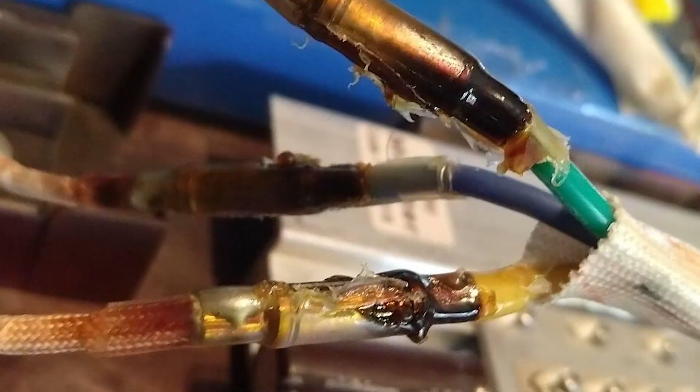It was around this time, in mid-2014, that I realized the severity of a lot of the electrical failures beginning to emerge. So I went to China, wanted to make sure all those quality control issues were squared away. My first stop was in Dongqing.

This area was interesting. You would see group rides just nowhere else in the world. This guy, Eric, he helped me out a lot.

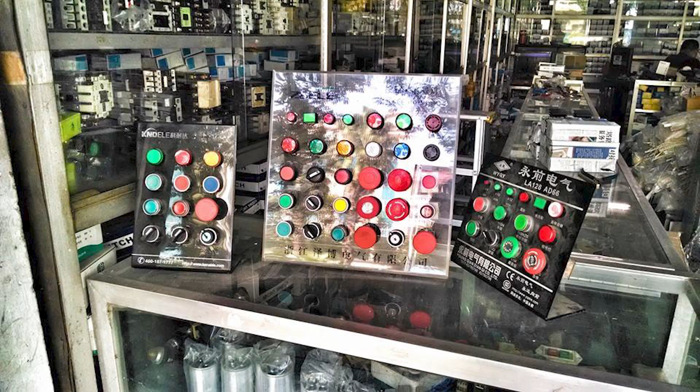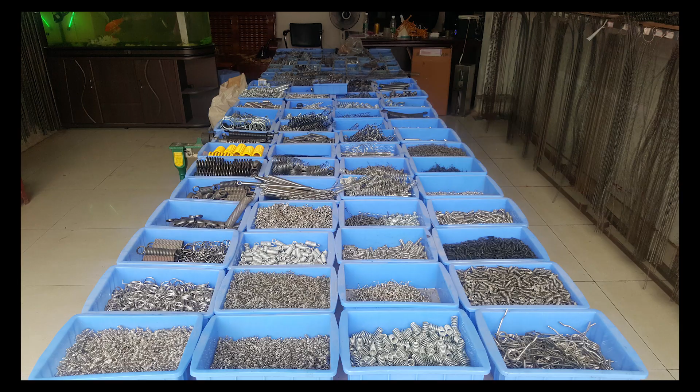But before I could even get to the factory, wait, stop, what's that? Air compressing tanks? Sheets? Rolls? Breaking Bad China edition? Chain assemblies? Pneumatic actuator shop? Button shop? A shop with nothing but wheels? A shop with pumps and motors? A shop with nothing but hydraulic couplings? A shop with pneumatic cylinders, springs, bolts, more bolts, more bolts, more bolts.

Yeah, time to go to Hong Kong. It's now October 2014, and there was some kind of protest going on at the time. I don't remember what it was about.

Now let's ride up in there, like on that hill. This is so steep. That's the mind-blowingly steep hill.

Okay, check it out. Turning is definitely not intuitive. It needs something to stabilize the leg.

Yes, that's Jason, the one who runs e-wheels nowadays. We sat down and had a conversation in 2014.

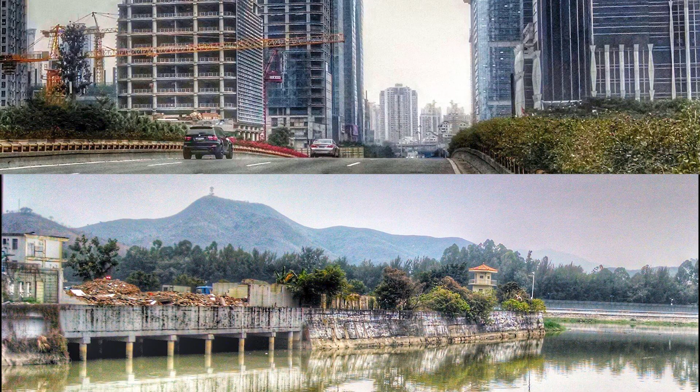Pack my bags, time to go to Shenzhen. Shenzhen, lots of buildings, lots of wheels, lots of wheel-shaped buildings. No, actually, there's only one of those. On the outskirts, you get these amazing, cool areas you could just explore and ride, and it's totally smooth. Cities, they just seem to go on forever.

And then I started getting into some group rides. You know, it was just a few of us. We had some wacky vehicles, and there's a one-wheel.

I was trying one of the first gen one-wheels in 2015. That is an SBU, self-balancing unicycle with a seat. I like unicycles without seats.

Gotway M10 Gen 1 edition. You can almost stop in place. There's so much turnover. I didn't take it easy on these early wheels. I pushed them to their absolute electro-functional limits.

Time to leave Shenzhen. We're going back to Dongguan, this time the Changping area, which is actually very close to where I originally landed in Dongqing.

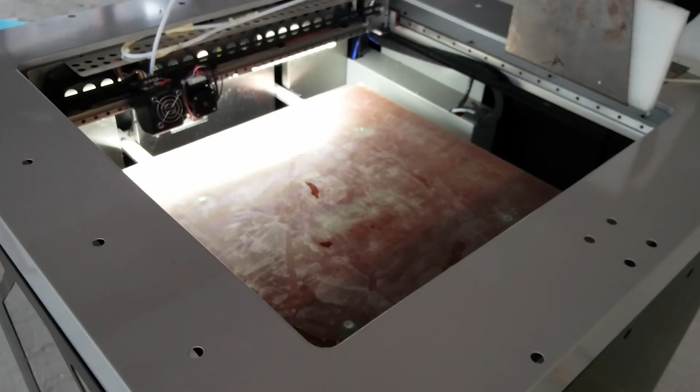So on my way, I built this contraption, and it landed an investment which basically set us up in this office with this giant 3D printer, literally a giant printer. And well, as you can see, it had some giant problems.

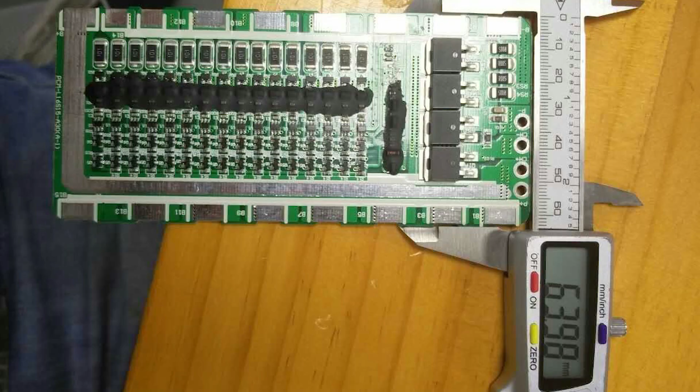Although we did get some successful prints, but the weld quality of early welders and the BMSs available at the time were just atrocious. However, you can see my first pack.

This was a prototype wheel we made. That's Ace, my mechanical engineer. He's the guy who set the foundation for my 3D modeling skill set, which I use to this day.

Back to Shenzhen. But this time, where am I? What am I doing on these one-wheel things? I was at this factory for a different reason, and they just happened to be lying around, so I happened to hop on a couple of them and ouch. But, I mean, it did the thing.

Now, this is a very unique picture. It's the only one I ever have of setting up this one-of-a-kind prototype device. It was so small, I could actually fit it in my backpack if I took the pedals off, and it was very nimble, and it had a hollow core motor.

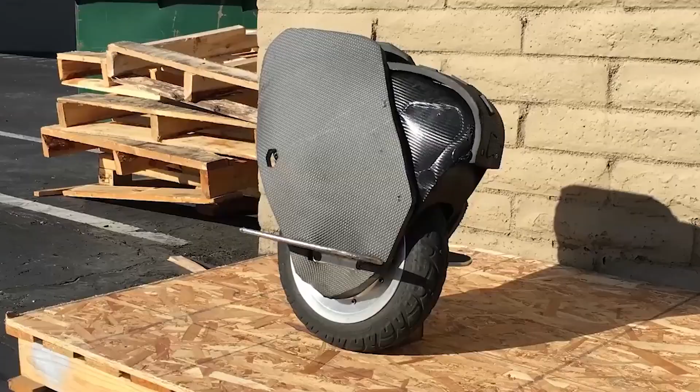Before, Gotway had hollow core, but the control system left something to be desired. It's time to go back to China and find a new controller.

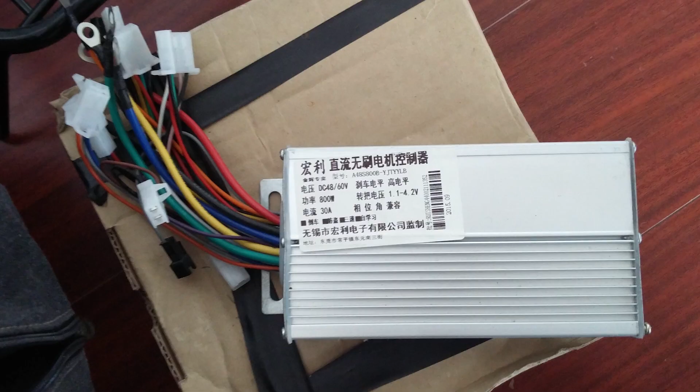I came across all kinds of interesting controllers. This guy didn't work, but it was very interesting. 2018, VESC hits my workbench and goes up in flames shortly thereafter.

But I think to myself, these motor controllers are very interesting. I should build an entire electric skateboard that runs on them.

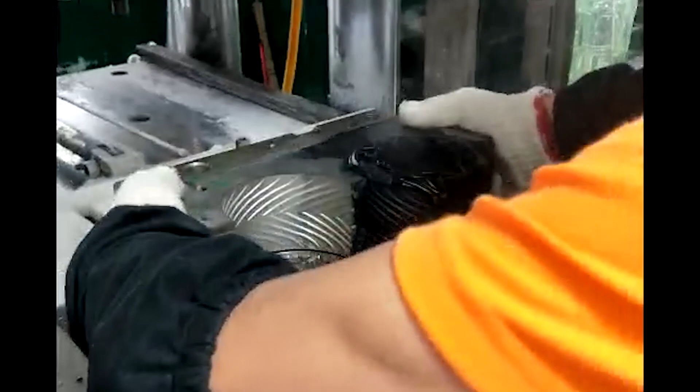As you can see here, this is one of our early prototype molds for the airless tire. It's actually vulcanized natural rubber, so it had a very long lifespan.

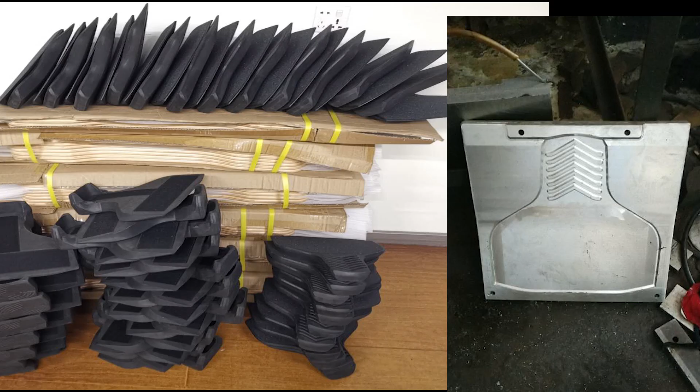It had custom built hub motors and early generation split packs, but as you can already start to see, these split packs are not ideal. We took things to scale, we built molds. Time to go back to the US and show people what we got.

For a hot minute, skateboards are actually faster than unicycles. We're moving, 41 miles per hour.

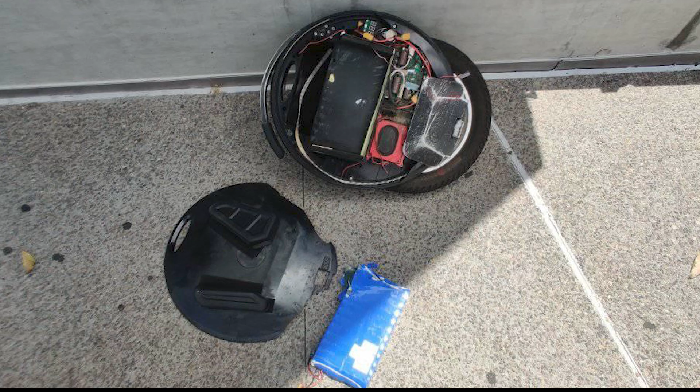To be honest, I like unicycle more and ended up pausing the skateboard company due to COVID. During that time, the unicycle, a Gotway Nikola, and I crashed it shortly thereafter.

I'm already wearing decent gear. A little bit of plastic stitching and she's back together.

Maybe I should start making my own mod kits. Like, what can I do with these plates?

But it's time to move, I need to get out of California. This time to Mexico, I get my own place. I don't have to share someone else's house. My own little FOCer, yeah, that's right.

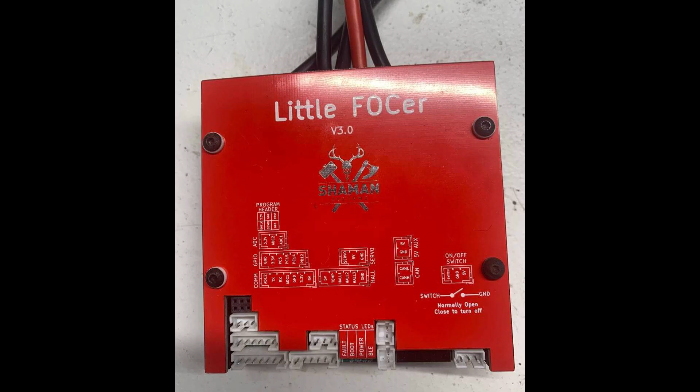Let's start VESCing some Onewheels. This one's already got a CBXR in it. How hard could it be, right?

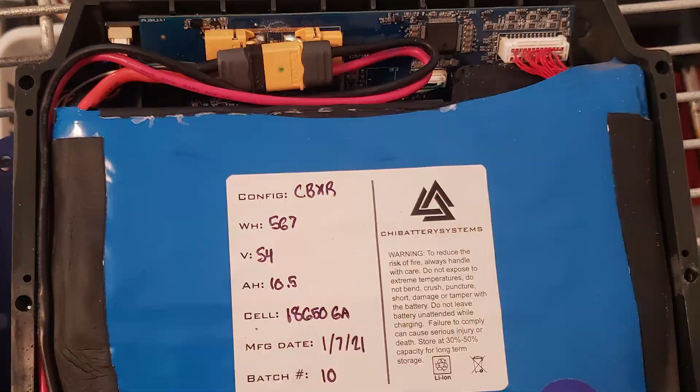But we were on the Balance app, and 3D printing boxes was the norm. A box? Well, no, not that kind of box. This kind of box, something more like this. Well, not literally like that.

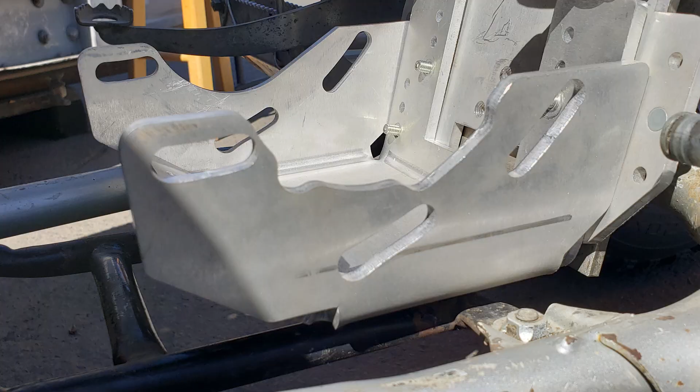The process, the sheet metal, it was actually quite amazing. Because if I could use sheet metal to hold a hub motor, I mean, it does that.

So basically, we could just make a box out of sheet metal and it'd be much more durable, but we have a welding problem still.

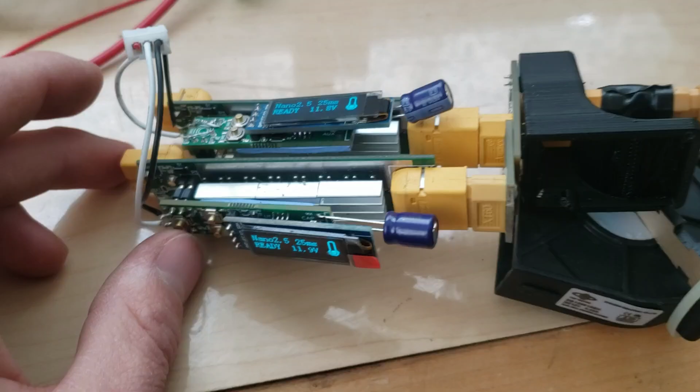Combining multiple welders off the market is not going to do the trick. But hey, I've got this pure AC generating out of VESC. Look at that, coming along nicely.

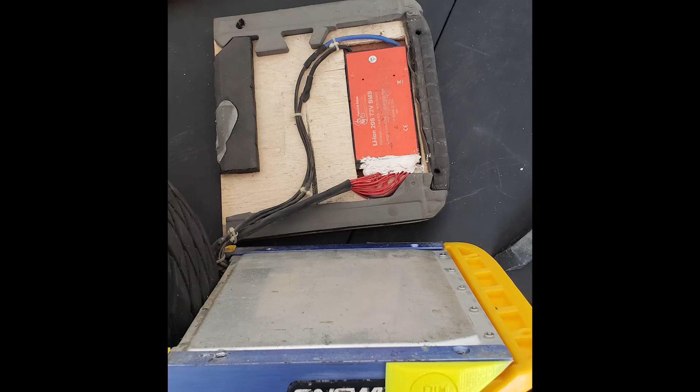Decent prototype, but the BMS problem still exists, and making these split pack things is a hassle. Look at how complicated that is.

We could get it to balance, everything was stable, custom VESC control, having fun, it's the life, you know, things are going great.

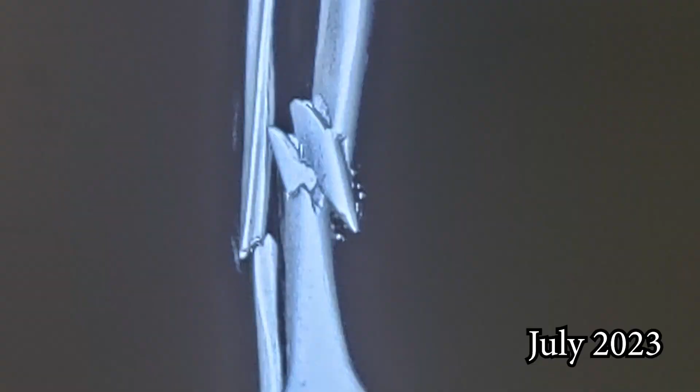But then one day, out of the blue, not this literal day, but it looked kind of like this, and ouch, yeah, I snapped 2 bones into 7 pieces in my leg. Ouch. On the Nikola, yep.

It survived though, keep on going. Now I have a car. So I cut my hair, started over, accidentally went to Las Vegas.

I think about armor a little bit more often, because, to be honest, if you've watched this video, you've seen me fall off maybe 1% of the times I've fallen off. What kind of material will we make it out of?

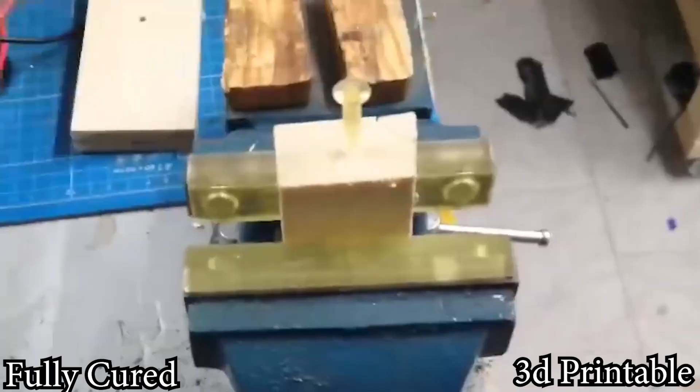Maybe something like this. Wow, it's strong, it's flexible. I could even use it as part of my other Onewheel enclosures.

My new enclosure, so this is the between the rails version. I'll just pull out these 4 screws first, and then we'll flip it over.

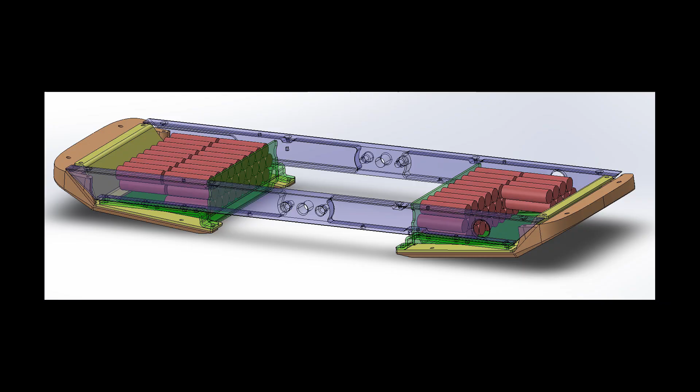And with the higher voltage controller, we'll need a BMS that can fit in a smaller form factor and hit higher voltages than ever before.

It's smaller and separated into modules. These modules can be interconnected and located in convenient places.

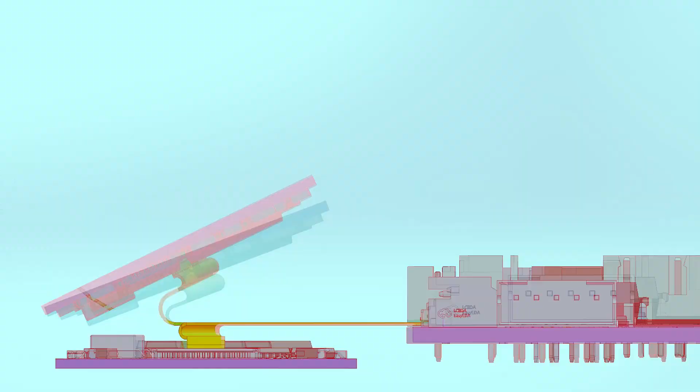I'll be open sourcing the firmware for this BMS, which allows it to access and communicate with your VESC motor controller. Here we have 8S balance modules that operate on flexible, basically super thin cables that can be daisy chained together to network multiple balance modules back to a master module, PSU, and charge port protection system.